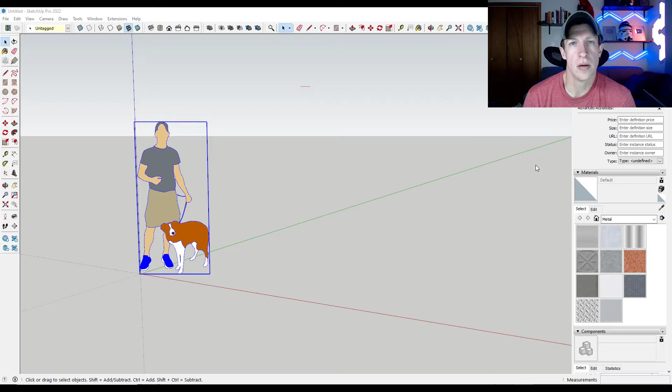So in today's video, we're going to talk about the line tool and how you can use it in order to quickly draw lines in SketchUp for iPad. Let's go ahead and just jump into it. And so you can activate the line tool by tapping on the little pencil over here on the left-hand side of the page.

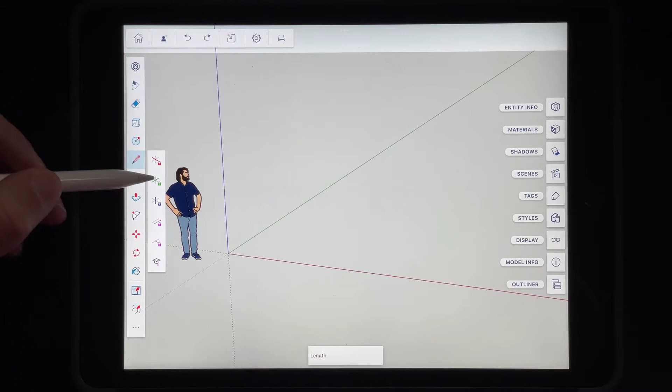Notice how that'll pop up a little menu here, which we'll talk about in a little bit. But basically, as soon as you see this being highlighted, that means it's time for you to draw a line. And so I can link to a video where we get a little bit more in depth with the drawing modes. But if you click on the little icon right here, you're going to have options for the just draw and the click, move, click.

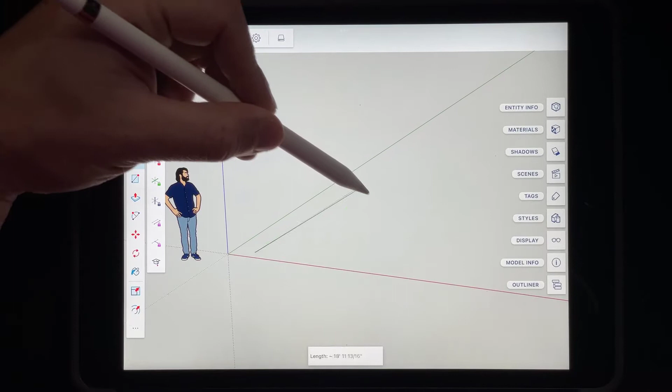Let's talk about the just draw really quick. Usually I use the click, move, click, but the just draw is basically going to, as soon as you put your pencil down on the screen, draw a line. And so wherever you move your pencil to, as soon as you let up on the pencil, it's going to draw that line. And notice how when it draws that line, it's going to automatically be active and ready to draw the next line in your scene like this.

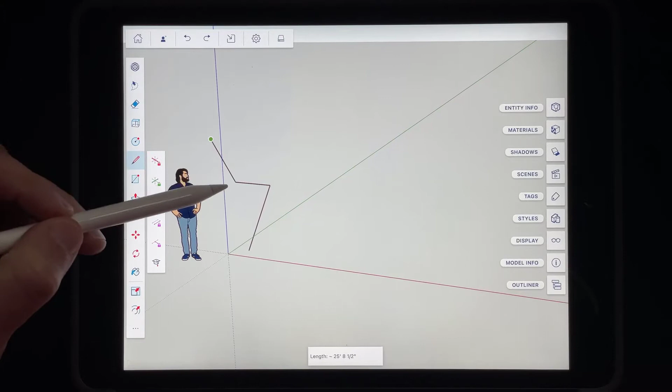So the line tool is always kind of prepared to draw into that next line like this. So that is one way to draw the lines. I prefer the click, move, click method because I find it to be more precise. So let's go ahead and let's erase all of that and do this with click, move, click.

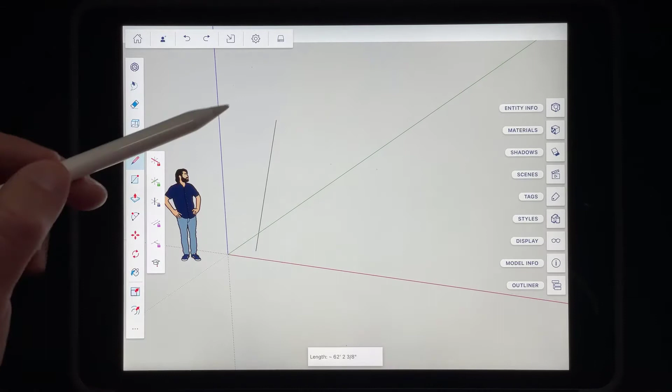So with click, move, click, whenever you put your pencil down on the screen, it's going to highlight something until you press down with your Apple Pencil like this. As soon as you press down, it's going to draw. And notice how now I can pick my pencil up in click, move, click mode. It's not going to finish my line until I press down again. So if I was to press down again, notice how I get a little flash right here, and then it's going to be ready to add my next line in here.

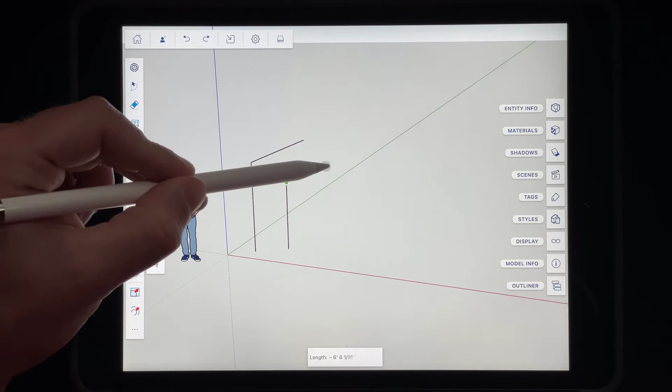And so one thing, at least for me, is when I draw like this, so I press down, and I draw again, I don't always want this jumping into the next edge right here. In order to toggle that off, I'm finding I just tap on another tool and then I tap on this tool again. There might be a faster way to do that, but otherwise it's going to keep trying to draw a line in here, which is not necessarily what you want.

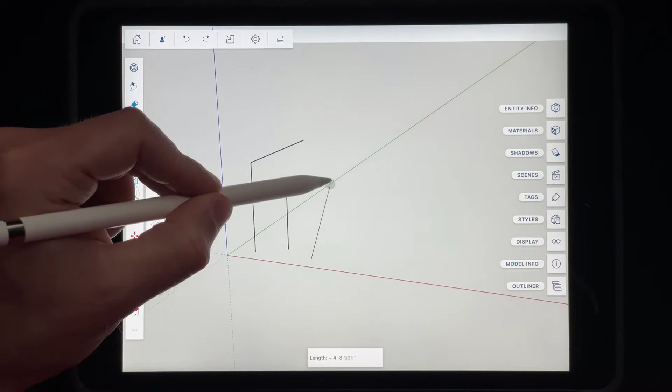But now let's talk a little bit about inferencing. And so you might have noticed when I press my pencil down and then I move it, depending on where I go, this line is turning colors. So if I go out in this direction, notice how it's turning green. If I go in this direction, it's turning blue. If I go in this direction, it's turning red right here. That's showing me that I would be drawing along these axis directions.

So in this case, we could say that blue basically corresponds with straight up and down. And so if I draw from here to here, notice how this line is blue. If I was to finalize this right here, I know that it's going to draw in a straight up and down direction. This is really helpful for drawing coplanar edges.

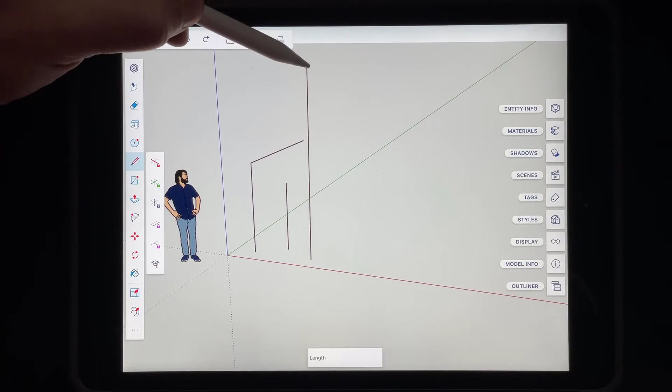Because let's say that I wanted to draw like a triangle in here, but I wanted there to be a face. If I was to draw along the red axis here, then I know that if I close this in, all of those edges are going to be coplanar.

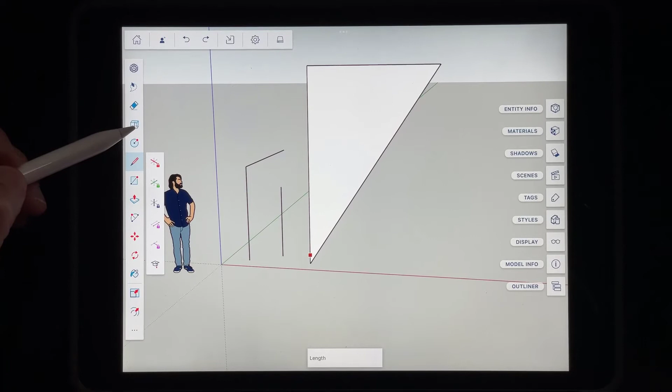And since they're coplanar, it's going to draw a face inside of them. So that's kind of one of the fundamentals of working with SketchUp, drawing things that are coplanar. I'm gonna go ahead and get rid of this. The other thing that you can do is you can also lock your axis direction by tapping on one of these right here.

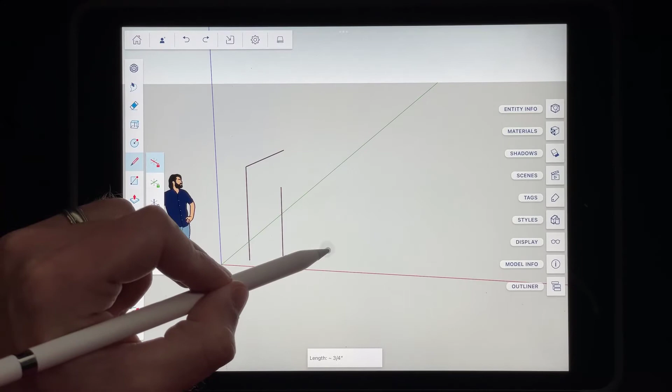So notice how I can use this in order to say, all right, no matter what you do, when you draw in this 3D space, you're only going to be able to work on the red axis, right? That's because I tapped on this red axis lock right here. I could also tap on the green axis lock. Well, then it's only going to allow it to draw along the green axis.

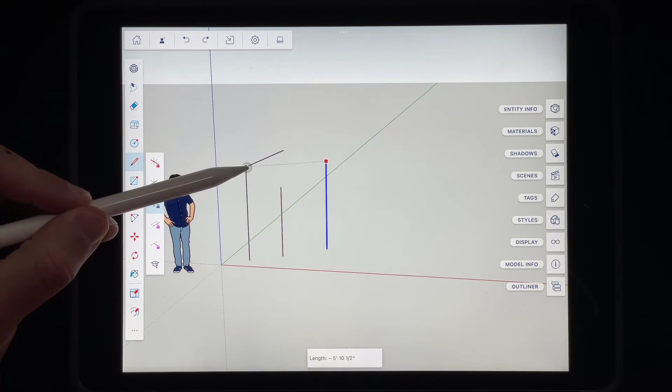So you can use these axis locks in order to make sure that you're going to be drawing on coplanar faces, which is really valuable in SketchUp. And note that there are a couple other tools in here. There's the lock parallel and the lock perpendicular. Let's say that we drew a line that wasn't along any of the axes, something like this. So we've got one line right here. We want to draw another line right here.

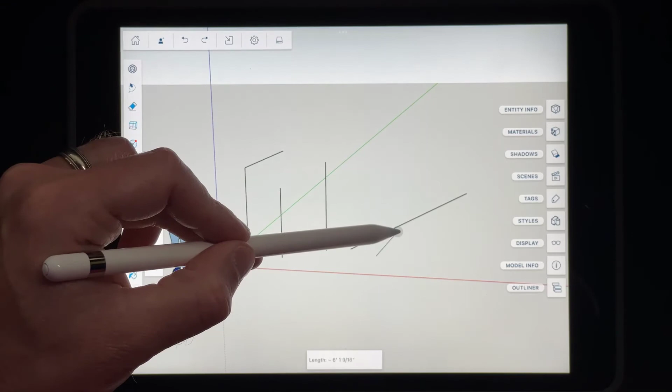So let's say that I was to draw another point right here, and I was to move my pencil over this line right here, and I was to find a parallel. Well, I could tap on the option for lock parallel. And once I do that, it's only going to draw a line that's parallel to this other line. As far as I know, that one is only going to work if you've already found that parallel direction inside of your 3D space. But you can use this to lock parallel as well as locking perpendicular.

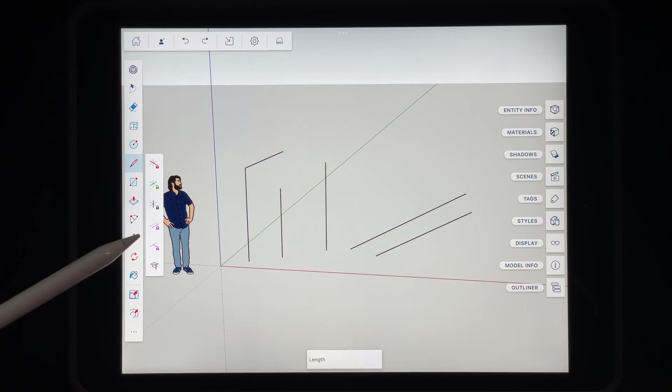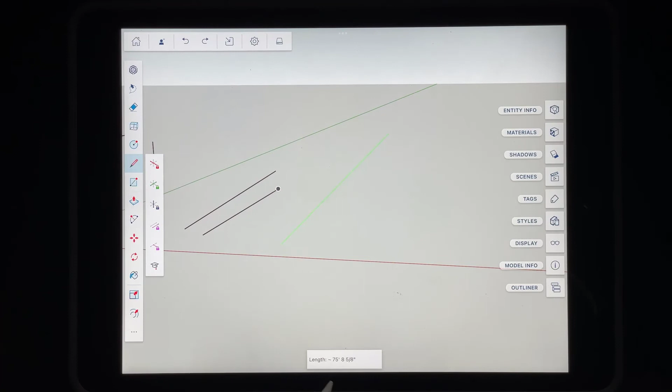And then the other thing is you can also draw lines precisely. So let's say that I want to draw a 6-foot line along the green axis. I can press down in order to start this. I can lock this on the green axis, or I guess you don't really have to. You can just move your pencil in that direction. But instead of pressing down, I'm going to tap in this little value control bar right here. That's going to pop up this little calculator.

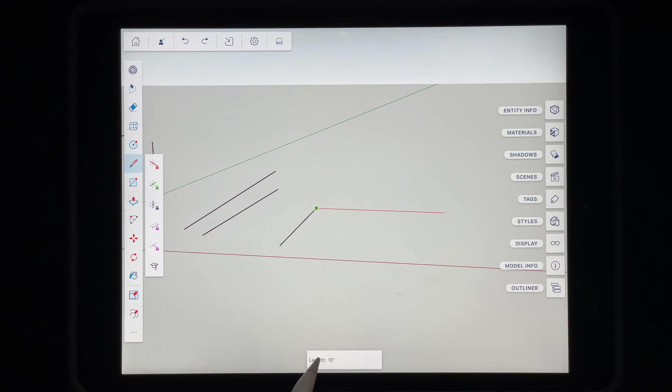What I can do with the calculator is type in a value. So let's say I wanted this to be 10 feet long. I would just type in a value of 10 feet and hit the enter key. And as soon as I do that, that's going to draw a 10-foot line. So I can use this to be much more precise. I can draw a line in this direction that's 25 feet long, like this. So you can use this in order to precisely draw lengths inside of SketchUp.

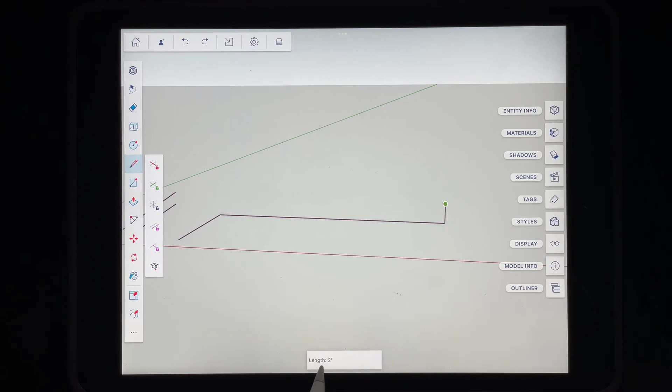And note that this is live, meaning that until I go out of this tool, I can actually go back in and change the value. When I hit enter, until I add another point in here, notice how I can type in different values. So if you type in the wrong thing, you can just tap back in here and type a new value like this, so that you don't draw a line that isn't the length you want. All right, so that's the end of this video.